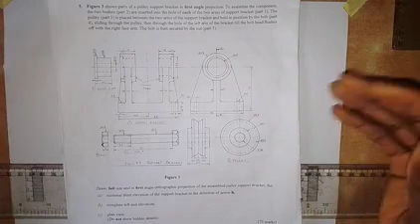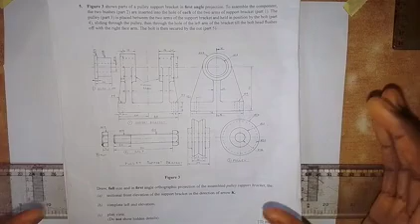In this video, what I'm going to do is produce the section of the individual components. I'll work on the sectional view of each individual component, and later make a video for assembling the parts together, but currently I'll be drawing the individual sectional view of each one of them.

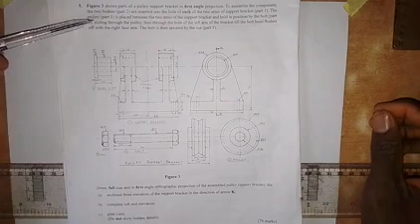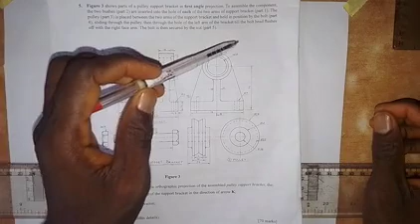Let me read the question. It says figure 3 shows part of a pulley support bracket in first angle projection. To assemble the component, the two bushes (part 2) are inserted into the hole of each of the two arms of support bracket (part 1). The pulley (part 3) is placed between the two arms of the support bracket and held in position by the bolt (part 4), sliding through the pulley, then through the hole of the left arm of the bracket till the bolt head flushes off with the right face arm. The bolt is then secured by the nut (part 5).

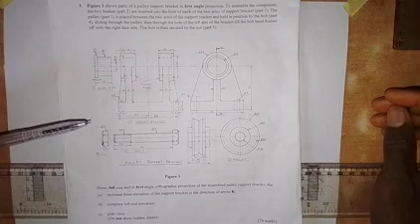So that is what we have here. This is part 1, the support bracket. Then we have the bush, part 2, and there are two bushes - one entering here and the other entering here. Then we have part 3, which is the pulley, part 4 is the bolt, and part 5 is the nut. Those are the components that we have.

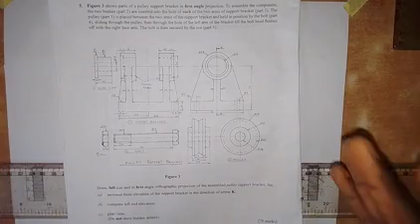As I said, in this video I'm going to produce the sectional view of the individual component, and later we'll assemble them together. So let's see how we can make the individual sectional view of each of these components. I'm starting with this support arm - I'm going to draw its sectional view as you can see on the screen. Let's look at how it will be.

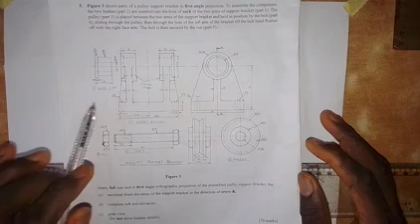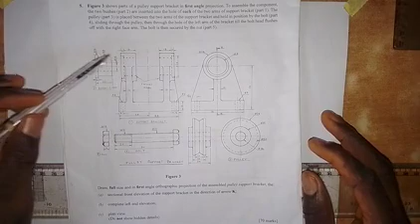Distance from here to here is 88, and from here to the center here is 44. Then the thickness of this is 10, and from here to here is 22, as we have 18 plus 4, that is 22. Then the distance from here to here is given on the end elevation, which is 48 millimeters. Then this part that we have here, the distance from here to here is given on the end elevation as 28.

Then we have the diameter of this hole, though that is within this, so we are not going to work with that. But for this part from here to here, we have it to be 36, as given here. So that is what we are going to do.

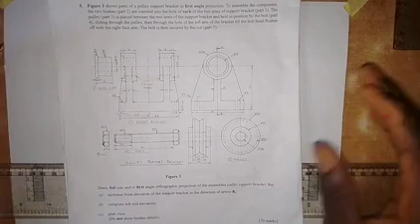So let's see how we can draw the sectional view of the support arm. Let's start with that - the thickness from here to here, as given, is 14 millimeters. From here to here is 14 millimeters. So we are going to start with that.

The first thing I'm going to do is draw a vertical center line. I'll put it here, like this, and we draw a vertical center line.

Then we are going to draw a horizontal line here. On this line I'm going to take 14 millimeters - don't forget we want to draw the sectional view of the support arm. So here I will draw a horizontal line like this.

Then the total length as we have is 88, so 88 by 2 gives us 44. This is 44 to the left side, then 44 to the right side. So here we draw a vertical line, and then we come here also and draw a vertical line. That is done.

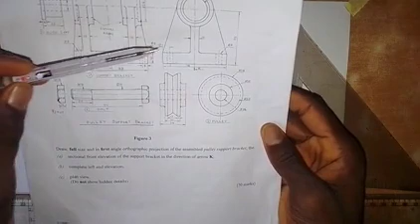The next thing I'm going to do is take the height. The height from here to this center line is 72, so I will take a measurement of 72 right from the base, right from this part - 72 up. So here we have 72 millimeters, and I'm going to draw a horizontal center line here, like this.

Now, the space between this support arm is given here on the pulley, which is 34 millimeters, because the pulley is to occupy this space. So the thickness from here to here is 34. So I'm going to take a measurement of 17, 34 by 2. So 17 millimeters to the left side, and 17 millimeters to the right side, making 34.

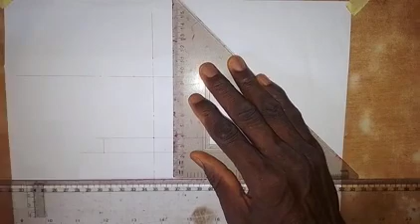So here I'm going to draw a vertical line. I will take a vertical line, draw it here like this, and then I will come here and draw another vertical line.

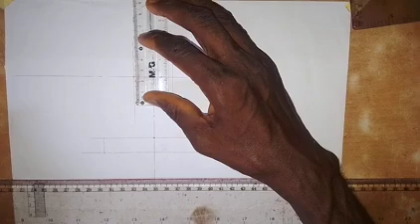Then another thing I'm going to draw, for the distance from here to here, as you can see it is 48. So 48 by 2 gives us 24 millimeters. So I'm going to take 24 millimeters up and 24 millimeters down, to make it 48.

So here I'm going to draw a horizontal line up here. So the horizontal line goes like this. Then I will come down here and draw a horizontal line like this.

Alright, so next I'm going to take the width of each of these. From here to here is 22. From here to here is 18, plus 4, that's 22. So I'll come to this point and take 22 millimeters to the left side. Then from here I will take 22 millimeters to the right side.

Then I'm going to draw a vertical line. I need to extend this horizontal line a bit to the right side. Okay, so we have this. Then I'm going to draw a vertical line down. Okay, then coming to this side, I will draw a vertical line. So I have this. Let me leave this for now.

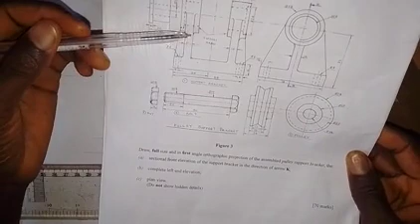So let's produce this part here, which is 10 millimeters. And this also 10 millimeters is in the middle of that 22 millimeters that we took. So if I divide 22 by 2, that is 11 millimeters. I'm just going to take 11 millimeters here.

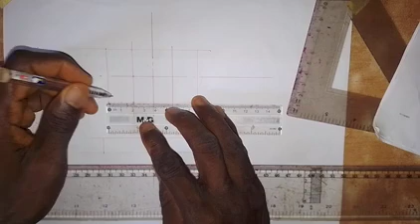Then from this point where I have 11 millimeters, I will take 5 to the left side and 5 to the right side, and I will repeat the same thing here. So dividing this into 2 gives 11 millimeters. Then coming to this point, I will take 5 millimeters to the left side and 5 millimeters to the right side.

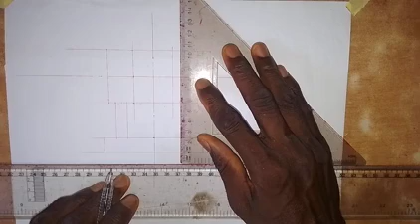So now I will produce that part. All I need to do now is draw a vertical line down here like this. Then coming here, I will draw a vertical line down like this. Then here I'm going to draw a vertical line down, and here I will also draw a vertical line down.

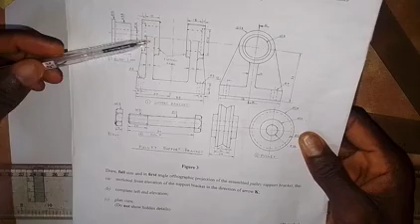Alright, so we have this. Now, to continue, what I'm trying to do here is this part that we have will not show, it's for the real front elevation. Now it is cut by this cutting plane, which we are working with to produce the sectional view of this particular component, the support arm.

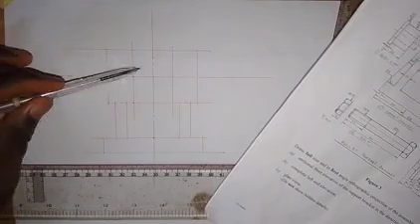So the cutting plane has cut, and this part is removed. What we are to see is what we want to produce here as the interior part of this component. So what I need to do now is create this part that we have here. Let me bring it up, so I need to create it.

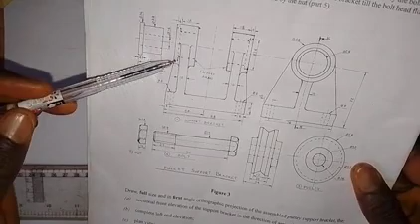And the distance from here to here, as given in the end elevation, is 28 millimeters, that is diameter. And from here to here, sorry, it's 36 millimeters from here to here. That is given here in the end elevation, while this hidden part from here to here is 28 millimeters.

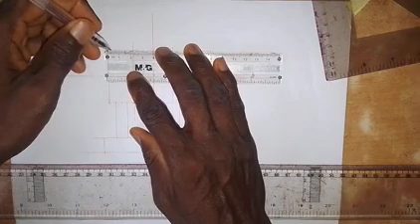What I'm going to do now is come to this center and divide 36 by 2. But before that, let me take a measurement of 4 millimeters from here. So 4 millimeters at this point. Then I will come here and take 4 millimeters from here as well. So this is 4, let's get that done at once.

Okay, so at this 4 millimeters, I'm going to draw a vertical line here, down like this. And I will come here and also draw a vertical line down. Alright, so that is done.

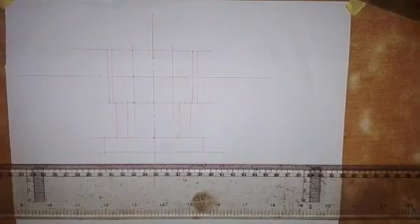Then the next thing I'm going to do is take a measurement of 36 by 2, which gives us 18. So I take 18 millimeters down here like this. Then 18 millimeters up, to make this it.

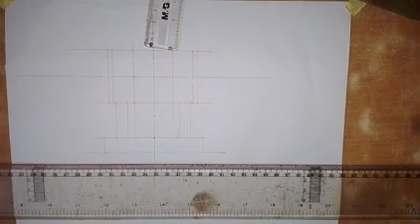So this is 18 millimeters. So we have it there. Now I'll use my black pen to create that part. I'll draw this now, and then I'll draw it here too. It also goes to this part. So at once, we also come up here and draw the line here, and I will also draw the line here.

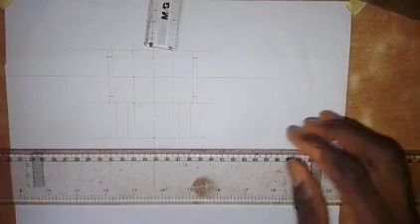Alright, so the inner hole that we have, the diameter is 28, so the radius is 14. So from this center line, I will take 14 millimeters down, like this. Then I will take 14 millimeters up. So let me bring it up here. So this is 14 millimeters.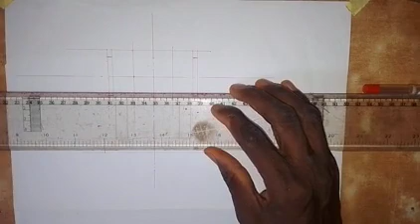Alright, so now what I'm going to draw here, I will take this and draw from here to here. From here to here, then I will also draw from here to here like this. Then coming up here, I will draw from here to here, and I will also draw from here to here.

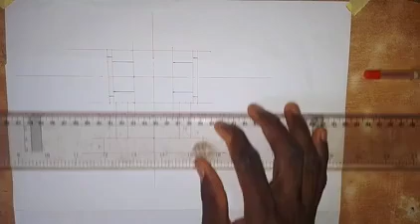Alright, so this line, make it a thick line. Also this part, we also see it as a thick line. This also will be a thick line. Then coming here, this will be a thick line, and this will also be a thick line from here to here. Then here also we have, this should be a thick line, and this is also a thick line.

So we have that. Alright, so within this part, this line is a thick line. So all this together should be made a thick line, down to this point. And then this also is also a thick line. So we have it like this.

Alright, so then another thing that we need to put here is this internal hole that we have here, this particular hole. It is hidden in the front elevation, and the diameter is 14 millimeters. That would be 7. The radius is 7, so we need to produce that.

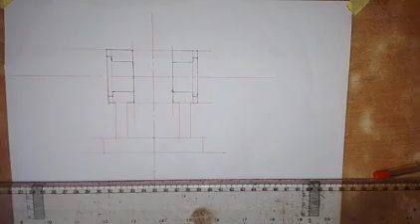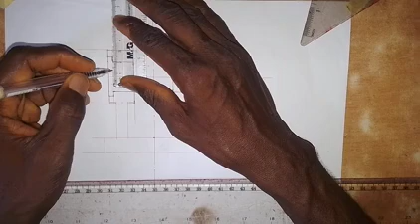So I will come to this point here and take a measurement of 7 millimeters down, 7 millimeters up. So this is 7 millimeters down here, 7 millimeters up, to make it 14. So all I need to do here is make this a thick line. We are going to see it, since we are producing the sectional view.

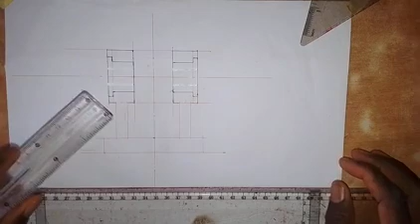Alright, so the line that I just drew now, I found that we are not supposed to draw it, because that is in the bush here. It's not supposed to be part of what we are going to see within this support arm, because we are producing the sectional view of the individual components. So that is not supposed to be there. I've removed it, so I need to make this line a thick line.

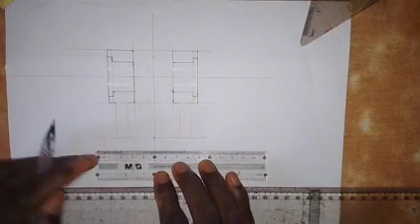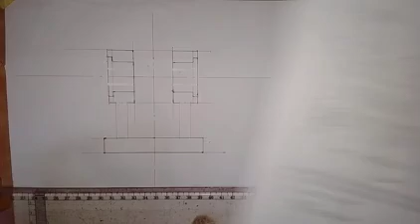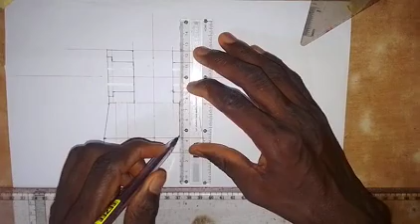So make this line a thick line from here to here, and we also make this a thick line from here to here. Then we also make this a thick line, and then make this a thick line. Then we have a web here, and this is also a web. So we just draw from here to here, joining this together with this, and we also join this together. Then this is going to be drawn a thick line like this, and this will also be drawn a thick line like this.

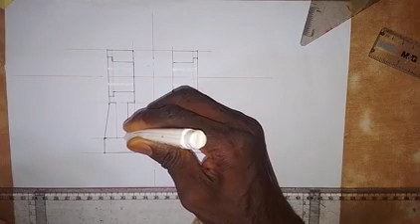Alright, so there is something that I need to remove here. This line is not supposed to be seen here, this line up to this point. So they are not supposed to be drawn thick, and also these are not supposed to be drawn thick. And I'm not supposed to draw this line, not supposed to make it a thick line. So you can only have that line drawn thick in the given front elevation.

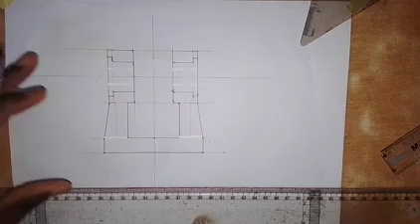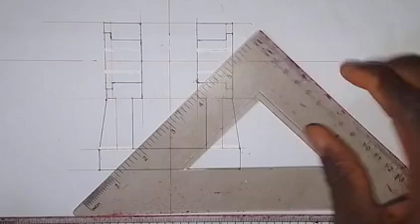So with what I've done here, I've drawn the view for the support, but we need to hash this part, hash the surface. We are going to make use of our 45 degree set square to hash it, so that we can bring out the sectional view of the support arm. So let's hash the surface. Since this is just a single component, we hash together in the same direction.

So we are going to start from this part, let's start from here. Since it's just a single component, we hash like this.

Alright, so I'm going to pause the video, then I will go on with the action. So when I'm done, I will come back and you see what I have done.

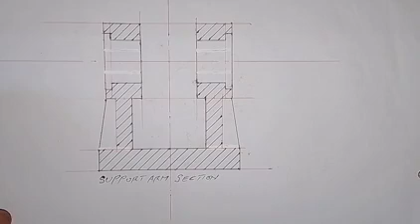Alright, so as you can see, this is the sectional view of the support arm, and this is how it should look. So let's move on to the section of the pulley. Thank you.